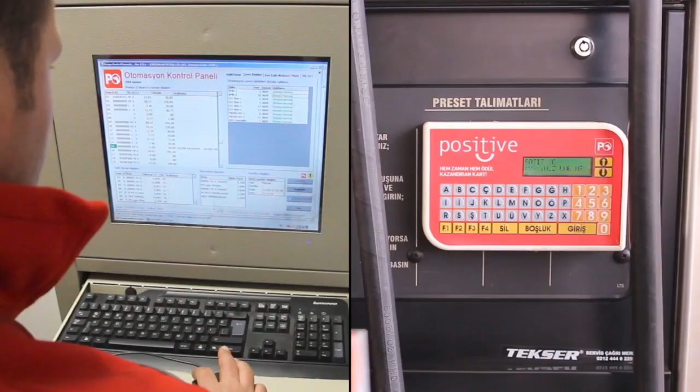After seeing that the products made significant contributions to the development of the sector and won considerable appreciation, ASİS Automation and Fuel Systems Incorporated was established in 2000 and expanded its lines of activities to meet the requirements of the fuel sector.

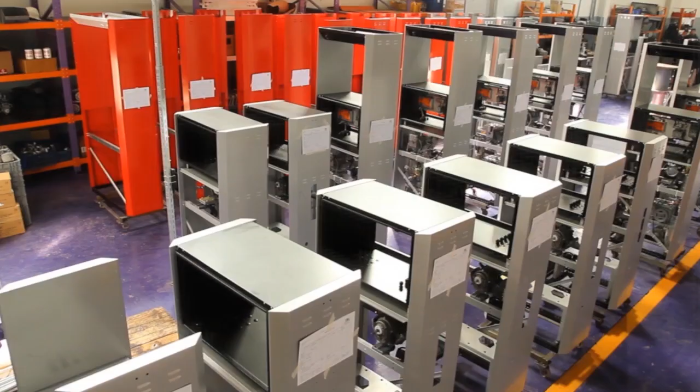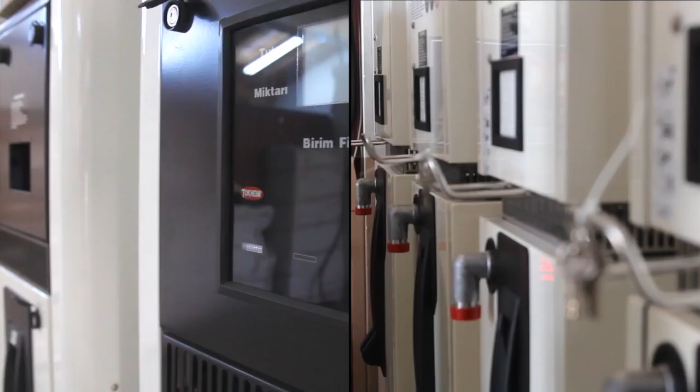ASİS has over 300 employees, including those of the group companies, and over 7,000 on-site automation systems currently in operation. Being a leader in its sector with systems operating in over 8,000 facilities and filling stations, ASİS is the technological supplier of over 20 fuel distribution companies.

ASİS has achieved becoming a brand not only in Turkey but also throughout the world and completed many projects for both the private and public sectors in Africa, the Middle East, the Turkic republics, Europe, and many other countries around the world.

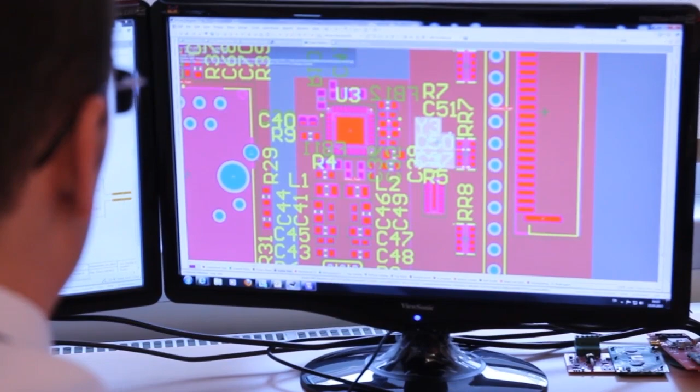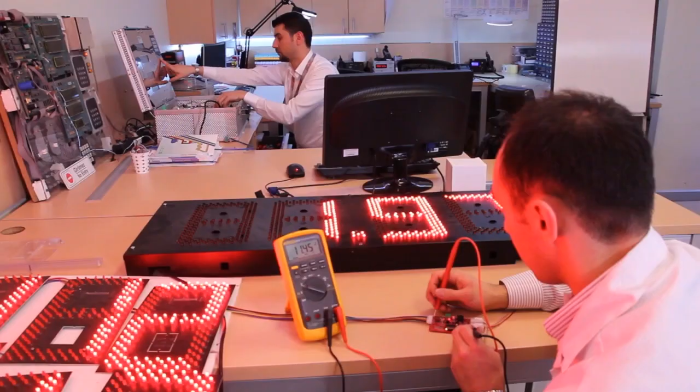ASİS leadership in the sector is more apparent in the fuel and LPG sectors. The company has specialized R&D groups operating within ASİS since 2000, considering the software, hardware, and function requirements in the automation technologies.

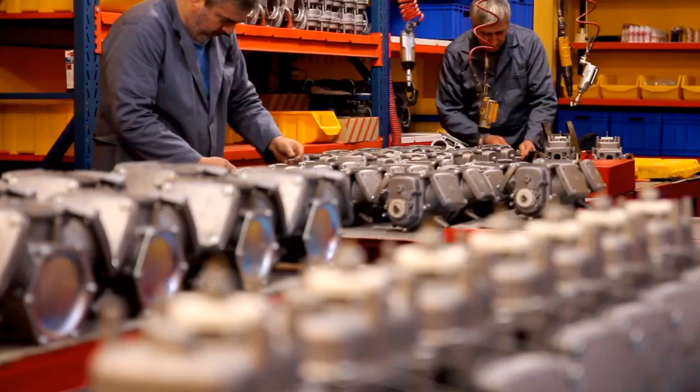Basic designs of the automation systems are prepared by these R&D groups and included in the product and service ranges of ASİS for offering to customers by the sales and marketing units of the company.

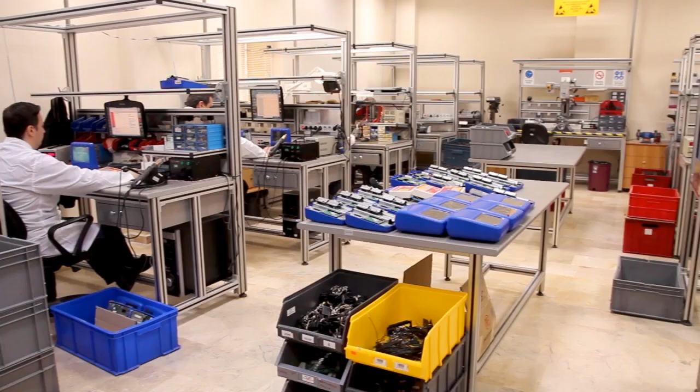The production of each product group is handled by specialist individual production units. ASİS and some of the group companies also have the Technopark status and implemented many projects supported by TÜBİTAK, the Scientific and Technological Research Council of Turkey.

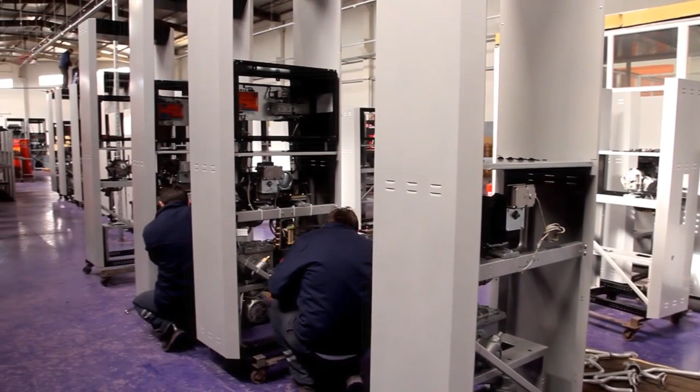The ASİS Group companies and technologies developed at the production facilities are Mekser machinery, fuel and LPG pumps, meters, electronic control systems for fuel dispenser pumps. ASİS Automation Kocaeli University Technopark Branch.

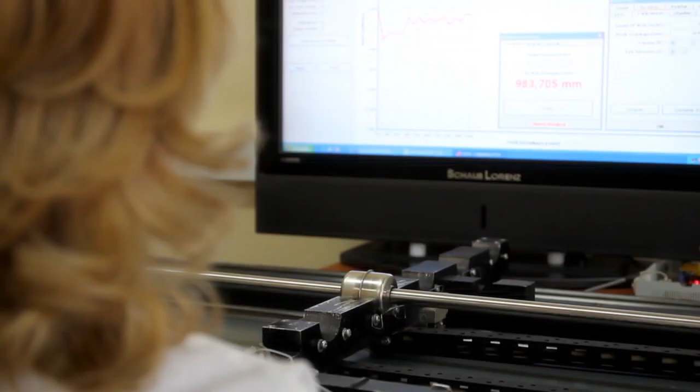Tank automation probes, probe floats, probe control units.

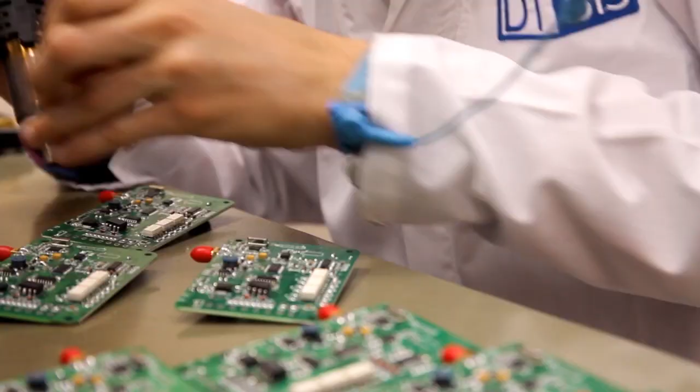DTSys, Digital Recognition Systems, RFID reader technologies, communication modules, validators, payment terminals, PDA, and different types of converters.

ASİS Electronics and IT Systems, vehicle tracking units, access control systems, personnel tracking systems, public transportation, and smart ticket systems.

ASİS Automation Systems mainly operate in hazardous areas of explosive atmosphere status. Therefore, occupational health and safety and environment criteria are vitally important for ASİS.

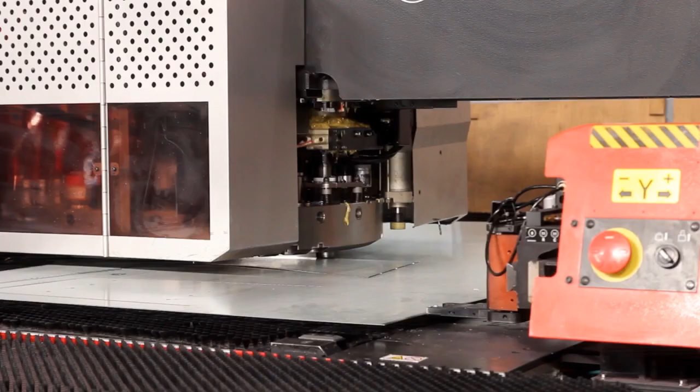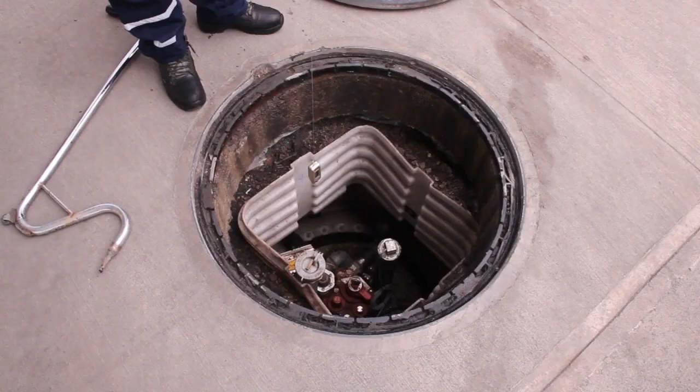OHSE criteria are involved primarily in the production stage. Products, components constituting the products, production personnel, and production methods are managed completely based on the ASİS procedures. Additionally, site applications, equipment, and technical personnel are also subject to the ASİS criteria.

Particularly, the system equipment and components are certified at international ATEX standards.

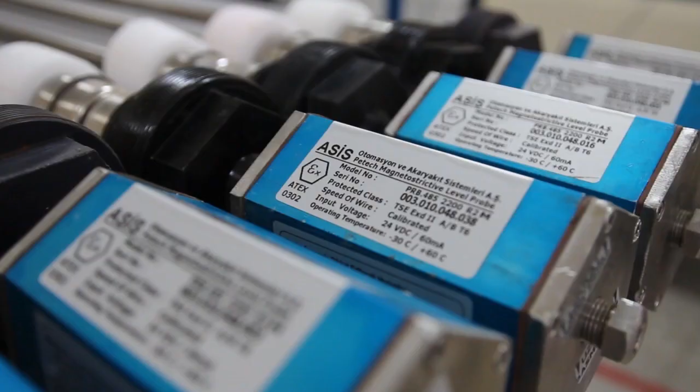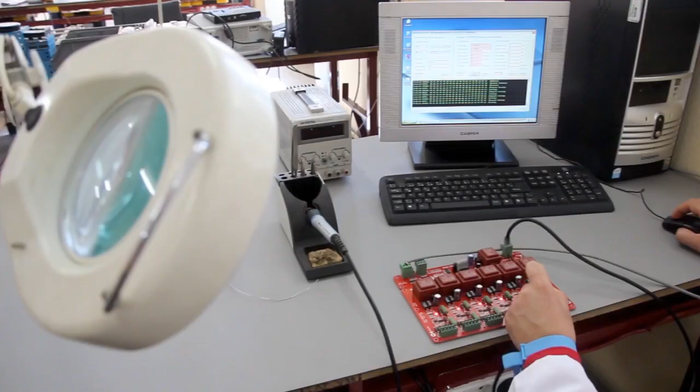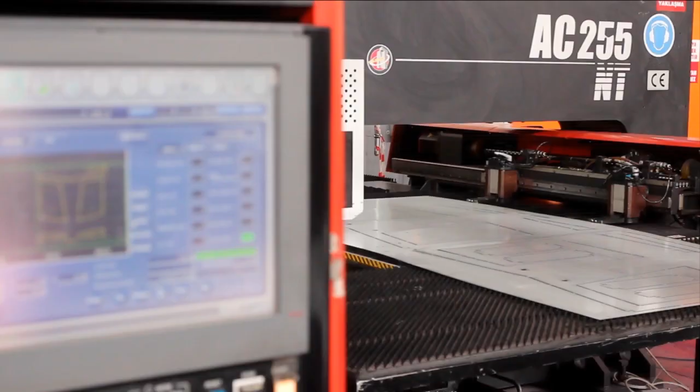Quality management is given great importance at ASİS. Inspection and certification of the quality and safety of products and services of ASİS conform to international standards. And all products and services are subjected to analyses continuously. The quality of all products and services is certified to ISO 9001, ISO 14001, OHSAS 18001 Quality Management Systems.

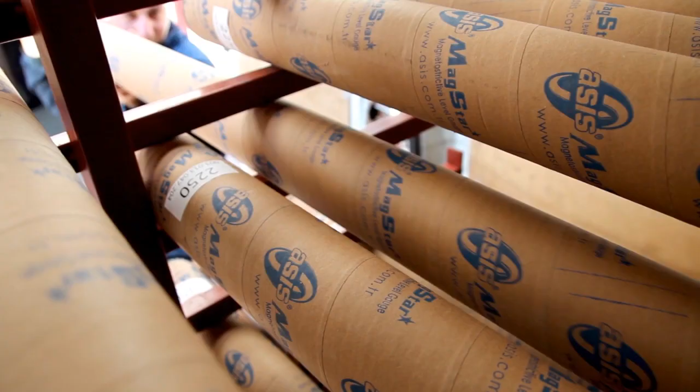ASİS has attached considerable importance to its site operations in addition to the R&D activities and developed the required organization accordingly. Central and regional logistics warehouses have been established to achieve a broad service network with the capacity to provide services, including logistics, in 81 provinces and 950 towns throughout Turkey.

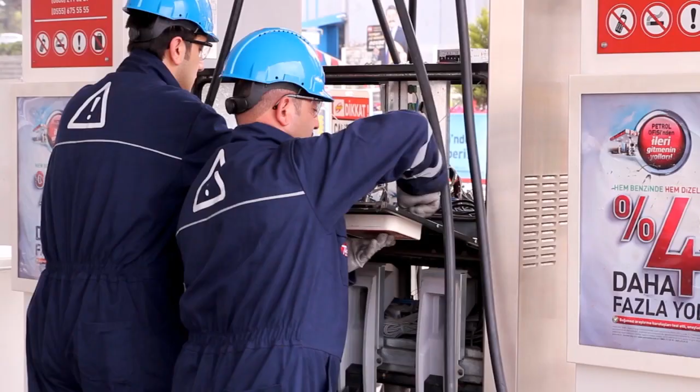ASİS is capable of providing services meeting all criteria according to customer requirements by means of this service network. Particularly working at filling stations that are considered hazardous areas, ASİS site teams receive advanced technical safety training to achieve a specific level of knowledge and experience in safety before they qualify for working on site projects.

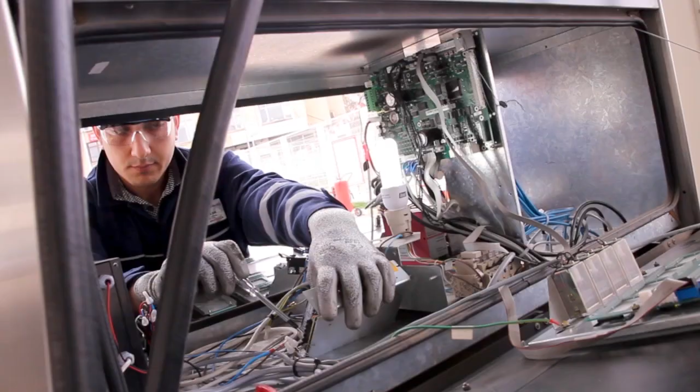Training and on-site operations of the teams are continuously observed and evaluated by the quality units at the company's headquarters. Training requirements and improvements are identified by evaluation of the results of inspections and observations. The primary purpose is to maintain the existing quality and then to increase the efficiency and quality.

ASİS provides services for its products and systems on a 7/24 basis through its call center, having state-of-the-art technology.

Upon receiving a call, it is forwarded to the concerned personnel automatically through the switchboard according to the keys pressed by the caller. During the call, the system displays the details of the specific customer on the screen of the respective call center personnel. After receiving information on the problem encountered by customers, the call center personnel checks the details of the problem by accessing the system remotely.

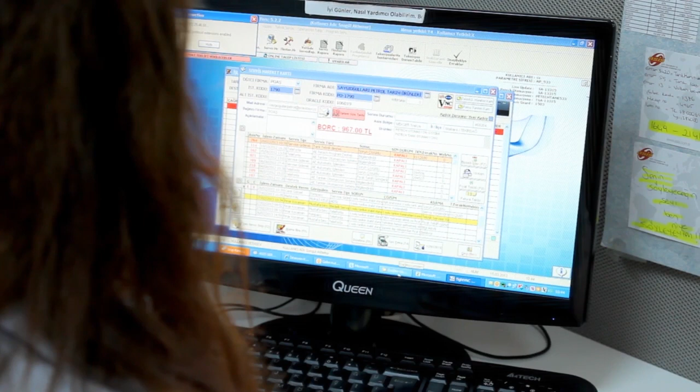Call center personnel continue the call with the customer simultaneously and share the information interactively. The personnel diagnose and solve the problems instantly and inform the respective customer accordingly. Unlike the standard call center, ASİS call center acts as a solution and analysis center.

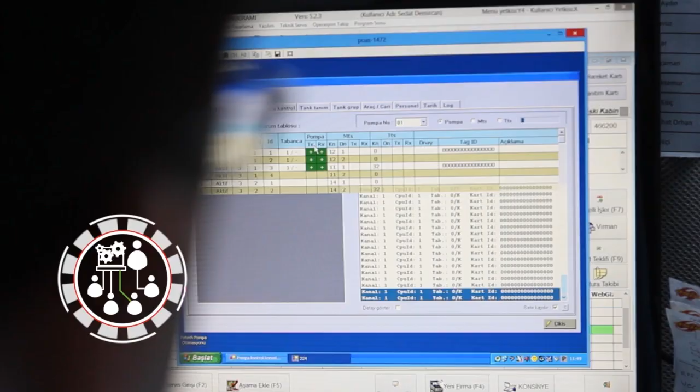In addition to the capability of solving problems instantly during a call, the call center personnel also transmit required data to the active support unit of the call center if any physical failures are detected in the systems. The active support unit personnel analyze the failure, organize the site teams and material and equipment logistics to provide on-site services at filling stations.

After reaching the respective filling station, ASİS experienced site personnel first inform the station executive. Then the area where the repair and maintenance services are to be provided is secured prior to commencement of the required processes. Site service teams identify and repair the failures.

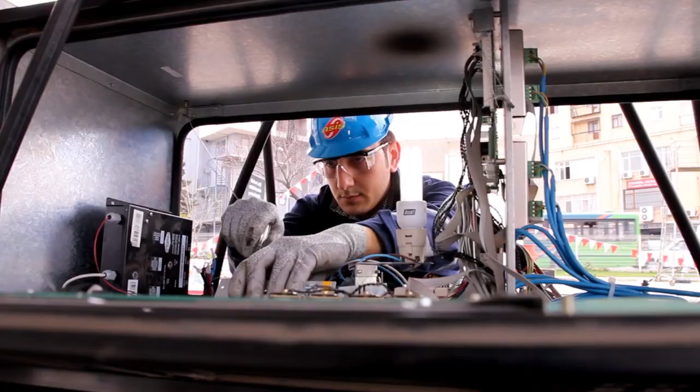The entire process from the moment of receipt of call by the call center to correction of the failure is automatically logged by the ASİS Automatic Failure Performance System, or AFP system. ASİS customers, who are fuel distribution companies, also have online access to the AFP systems platform to track all processes and procedures carried out under the technical support services.

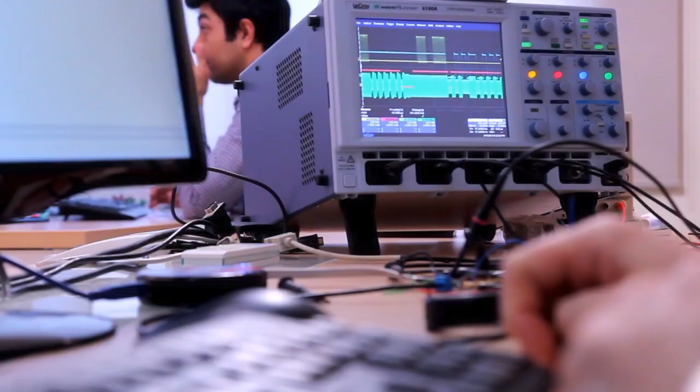Technical support data logged by the AFP system are evaluated by the technical and R&D teams of ASİS to improve the systems and services, to reduce failure frequencies, and to increase the quality.

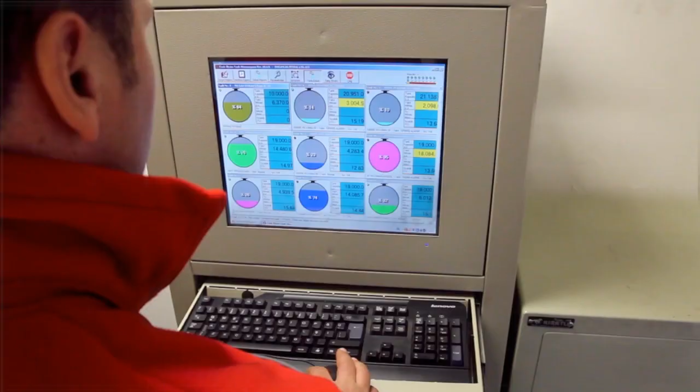Different technologies are used for inventory follow-up at filling stations all around the world. The most prominent one of these technologies is the tank automation systems. Regardless of the capabilities or quality of these technologies, the systems need to be correctly and accurately calibrated according to the tank in which they are used for measurement purposes to ensure accurate and proper operation of all such systems.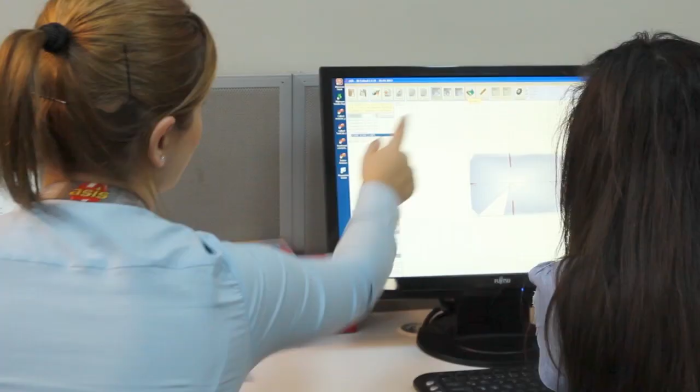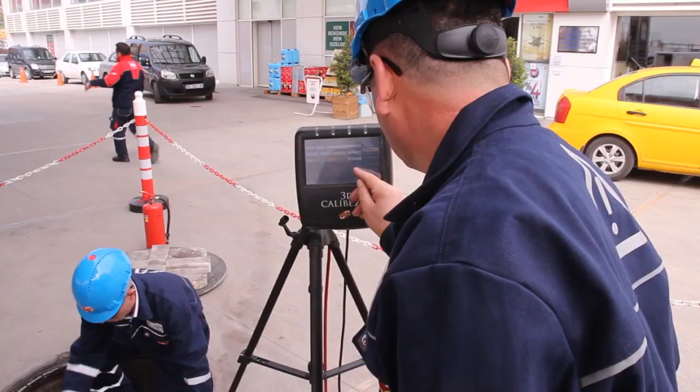With its vision to become an innovative company, ASİS started research and studies to create a more effective calibration technology in 2004. ASİS R&D teams continued their research to develop new, absolutely accurate and practical calibration technologies, and to make such technologies feasible. All these efforts have led to the development of the 3D Calibex.

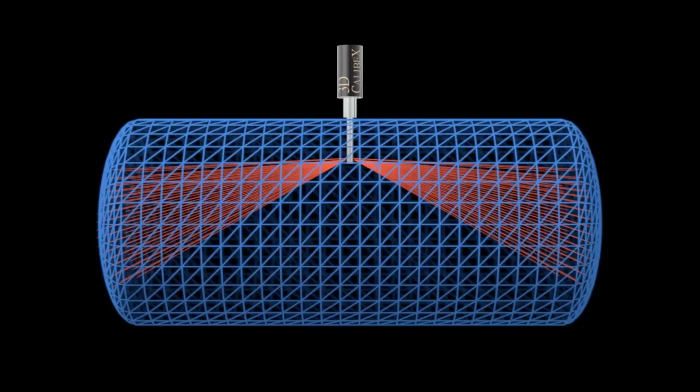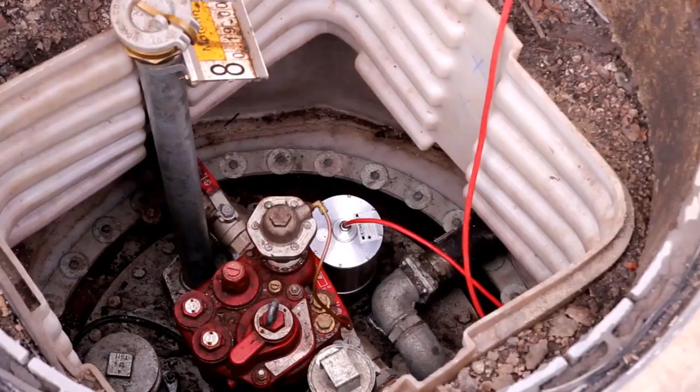3D Calibex is one of the most comprehensive technological projects ever developed by ASİS. The system consists of components involving advanced robot mechanics, mechatronics, state-of-the-art electronic circuit designs, integrated LEL device designs, laser and optics technologies, etc., as well as applications involving 3D modeling algorithms and data analysis software involving an advanced level of mathematics. The 3D algorithm technology used in the system creates a point space cloud, and the system accordingly creates a 3D mathematical model of the underground tanks.

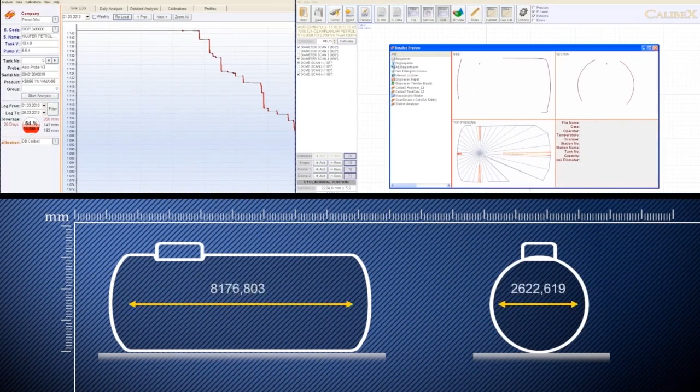All internal and external dimensions, volumes, inclination angle, head radius, etc. of underground fuel tanks are detected digitally and visually, utilizing the modeling data on the basis of the point cloud.

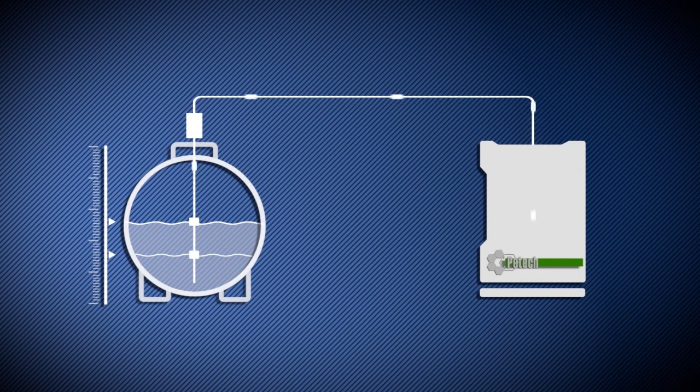One of the most interesting features of the system is its capability of recreating the calibration table of a specific tank at any time using the data obtained from a special electronic inclinometer and owing to the created model, in case of loss of calibration due to land subsidence, change of location of tank, etc.

3D Calibex is an invention which is patented by ASİS via international institutions. The system was secured by patent on April 23, 2009, after being subjected to patent search starting in 2007. The system has solved a critical technical problem using many innovations and is now under the protection of the PCT International Patent System as an invention.

3D Calibex is a unique system of its type in the world and is the most state-of-the-art and the one and only laser calibration technology with ATEX certification.